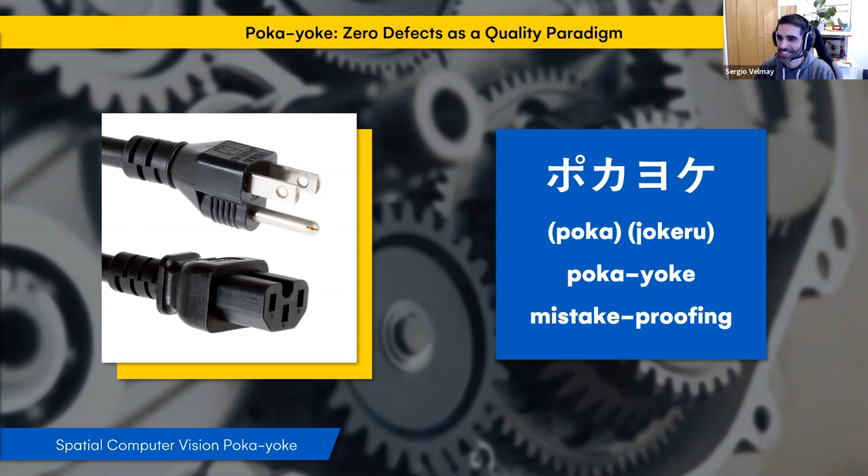Okay, here is the real world use case I chose for my proposal: a factory from my hometown, Getafe in Madrid, Spain.

In my job I have to go to the factory sometimes, and I speak with the operators and the QA staff and other people there, and they told me about the Poka-yoke methods and this kind of thing. I learned a lot. I was there to make a software application, but I learned a lot about the production processes.

And I chose the manual assembly lines, which have to incorporate that kind of Poka-yoke methods.

One of the problems they have is part picking. They have to assure that the operator took the correct parts. They have a lot of boxes near each other, and the parts are very similar, with just a little difference in shape or height.

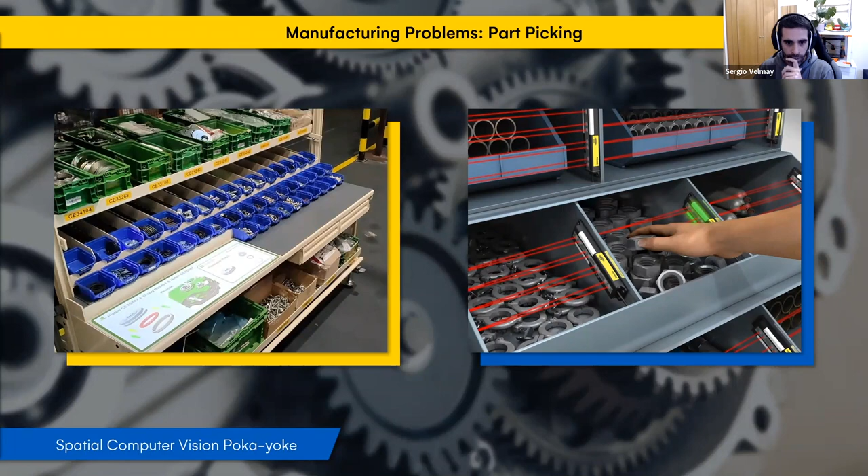For this first problem, I also used the depth information from the Oak D lite camera. It's very simple: the camera is placed on top of the picking area, and using the 3 axes we can follow the movement of the operator's hands and know if they are taking the correct parts.

For people who don't know, Oak cameras can run neural networks on the device itself. So you can train an image classifier, an object detector, or an image segmentation model, and then load it onto the device. The device is basically a camera.

It also does depth analysis, so you can know that a part is at a certain depth. It's sort of like the human visual system, which uses stereo vision to estimate depth while also interpreting the scene. Both of those things are in the Oak camera.

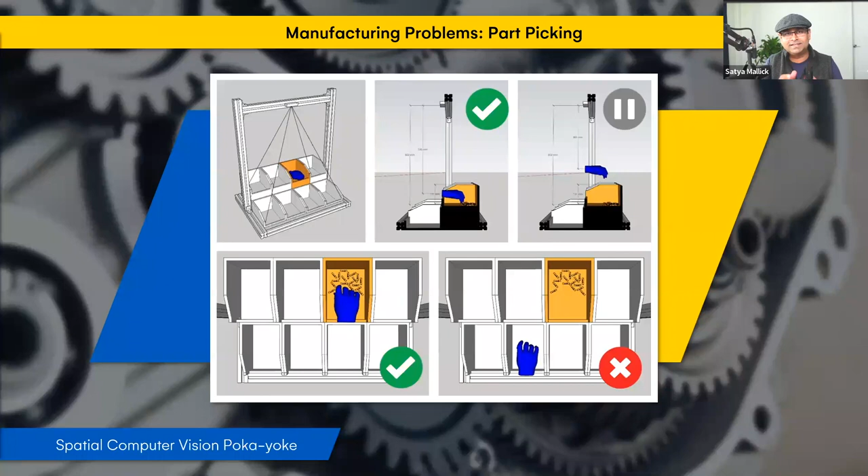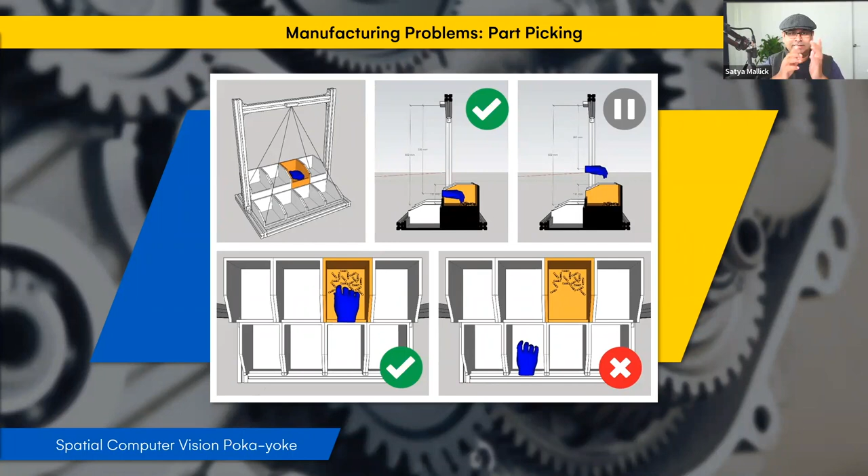If you look at the distance between the two cameras, they were also designed to mimic human eyes. The distance is about 72 millimeters, on the upper side of the human visual system range. The interpupillary distance between our eyes is usually somewhere between 65 to 70 millimeters. It looks a little something like this for those on the stream. It's pretty close.

I have to say I love these parts of the show when Phil appears like a banner. You're welcome, you got to give the people what they want.

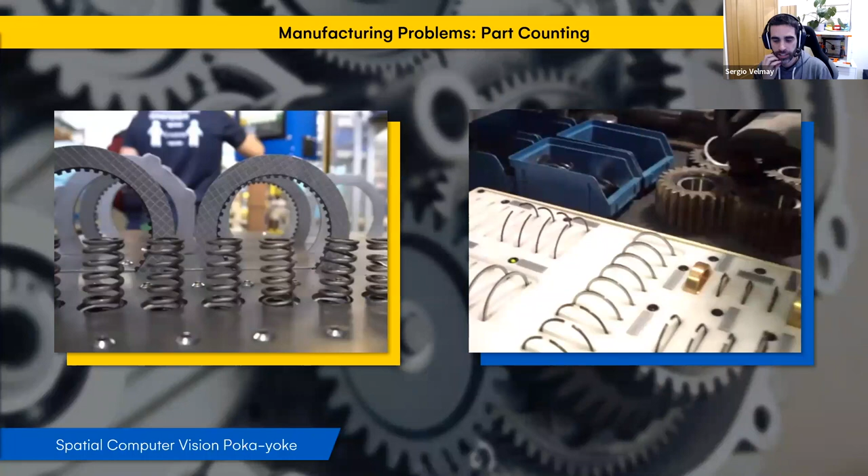Okay, a second, I have one more. I actually have a question here. I noticed you're using specific little bins, and it looks like - what did you make your little apparatus out of here? Because this is custom built, right?

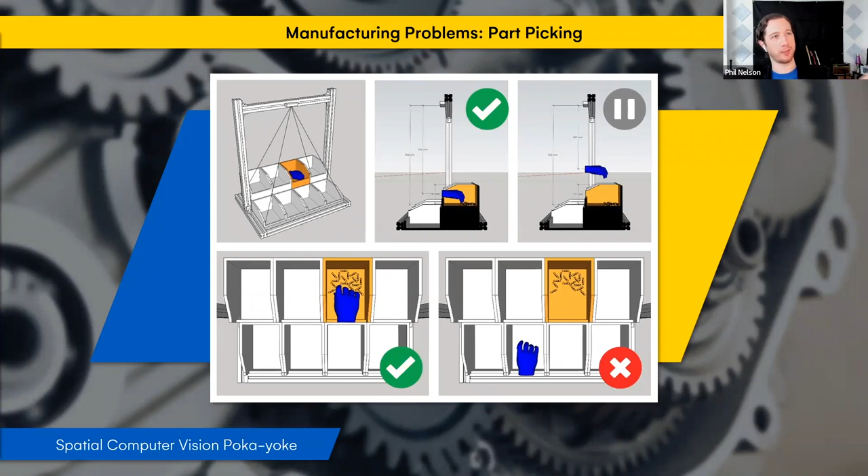Yes, it's custom built. It's a modular aluminum profile. With those slots in there, you can just order them cut to size, or buy them in a bundle. You can buy it at the size you want, and they have some screws, and it's modular. You can build whatever you want. It's not very expensive, and I built mine in 1 hour, and it's pretty simple.

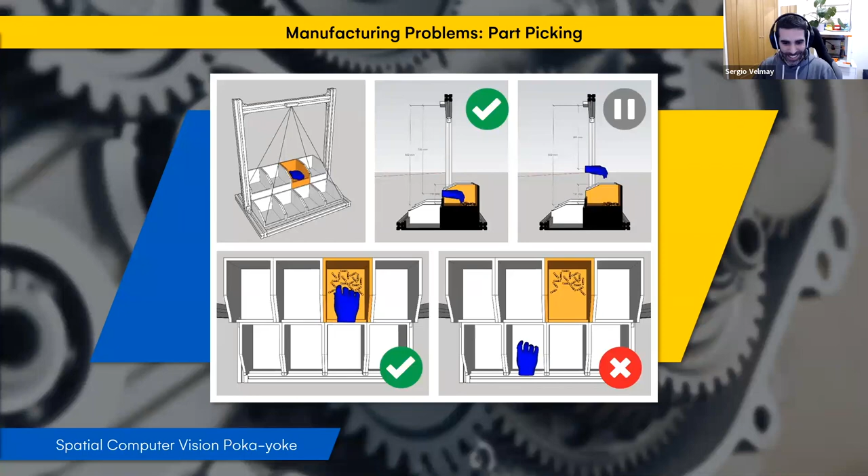Yeah, I love seeing off the shelf parts being combined in new ways. You can see it here behind me, it's the prototype.

Okay, the second problem I saw at the factory: they have to assure correct part counting, and at the factory they have very complex tables with lots of sensors. The operator spends a lot of time putting each part in each place at these tables before the assembly, and it's a lot of time that they spend only counting parts before the start.

Just so I understand, there is a table, the white table you're looking at on the side, and all the parts are placed at a specific location, and that's how the sensor inside would say, okay, the part is present and now use the part. So this whole setup is good, but you also need to spend a lot of time putting those parts manually onto this table. Yeah, that's correct.

And the two tables on the left - you need, for example, 12 springs, and you have to put the 12 springs, because the whole assembly cell needs a signal from the table that it's okay, all parts are in place, and you can start the assembly.

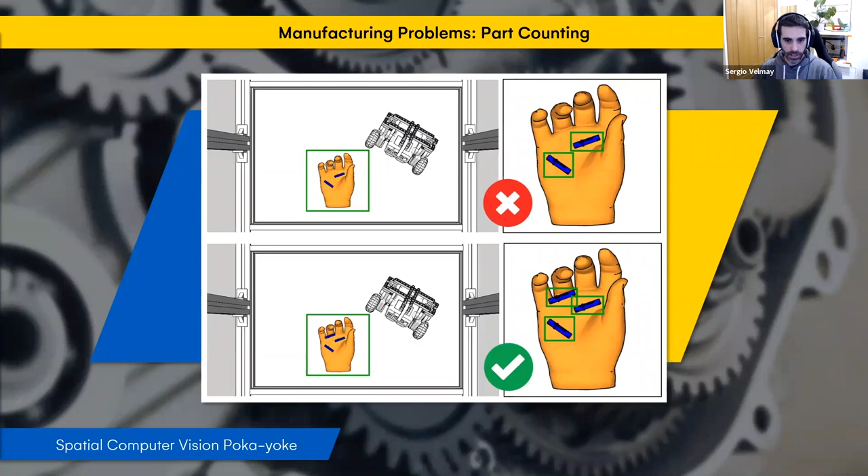Okay, and the third part is the most important one, because Poka-yoke methods try to avoid human mistakes, because an error in the production line becomes a defective product at the end of the line. For example, if you are making water bottles, and a bottle costs you a few cents, you can put a camera at the end of the line and throw away the 2 or 3 bottles that aren't okay - the label is misplaced, or they don't have the cap. But in this kind of assembly line, one defective product is a big deal.

And it's not easy to detect a failure or an error when you are building this kind of mechanism. For example, this is a gearbox from - well, a vehicle for the farm, I don't know how to say it in English - you know, like John Deere vehicles, a tractor, or like a harvester or a combine. Harvester is the word, thank you Phil. Yeah, you got to remember, I'm from farm country.

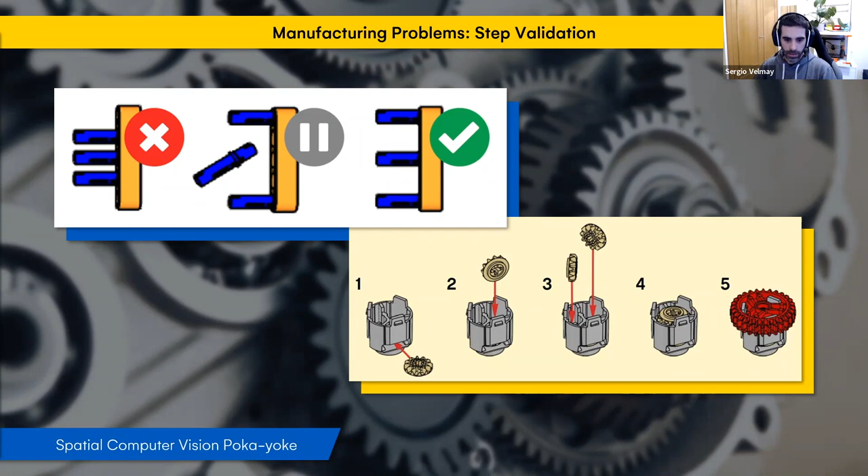This is the last part of the problem I want to solve with my proposal. In the next slide, here I have my prototype.

At this point, I think in the contest there are maybe two groups of proposals, attending to the relationship between the OAK-D Lite devices and the Lego kits. One group, I think, is where the camera looks or points from the Lego to the world, like autonomous robots or structures to hold the camera and move it. And I think there is another group in which the camera looks or points to the Lego.

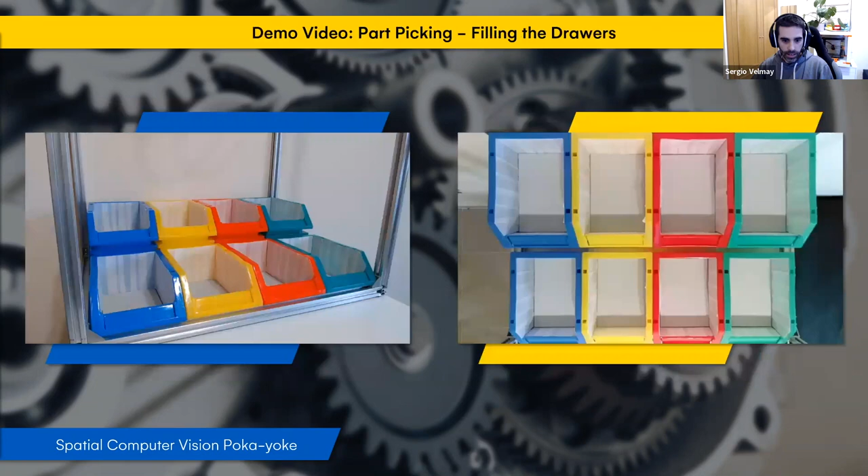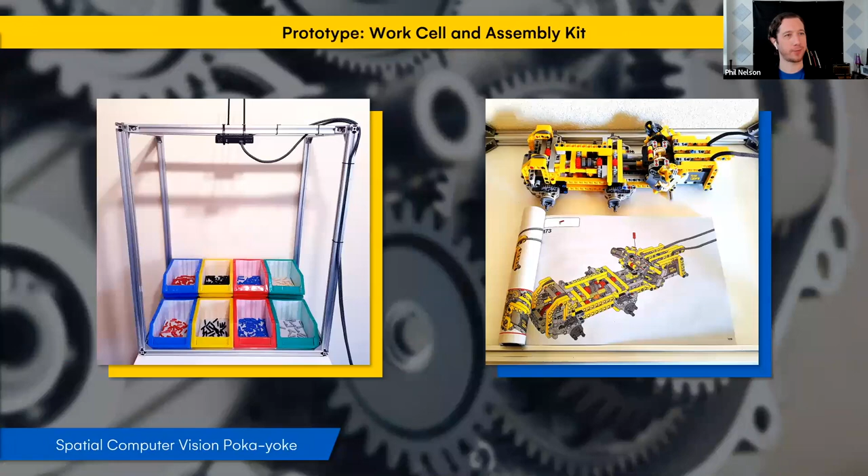Here we can see... it's not starting. You may have to right click and replay it. Those are GIFs, right? No, they are videos. Okay, now it's playing. I want to play the two at the same time, but also I just pissed off half the audience by saying GIFs instead of GIFs.

The right view is from the camera on top of the structure I built.

This is only the preparation of the... we cannot play media, I'm sorry. Can you open it in a different window? Yeah.

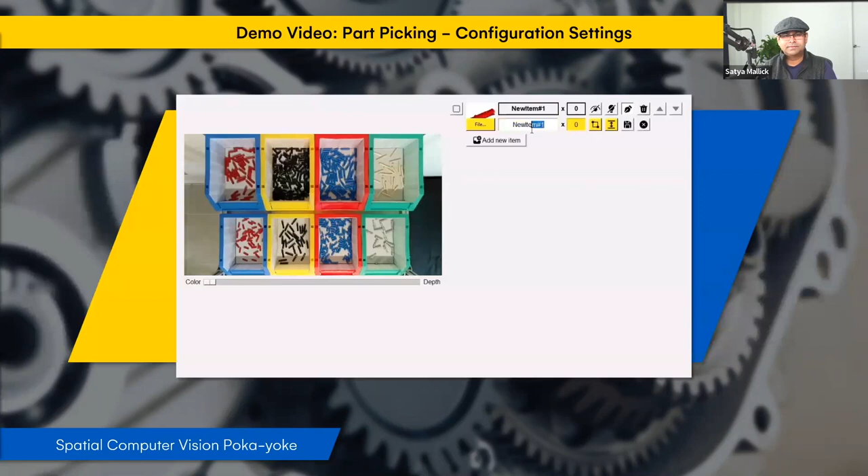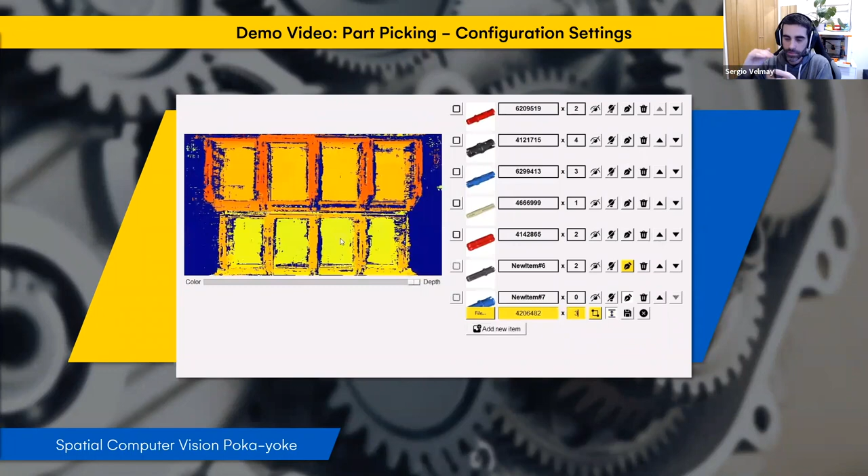Here we have the application that you have to set up. You have to tell the application where each part is, where do you put it, and you draw a rectangle that tells the application where the box is, and then you choose the range of the depth range. So you select the bottom limit and the top limit. Okay, and with that information...

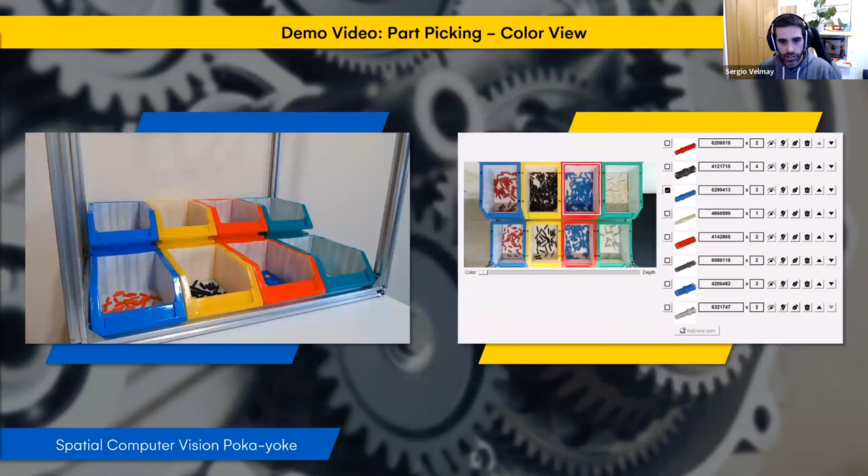Here at the same time. This time it works.

Here I am using the MediaPipe model to detect the hand. This gives you the center of the palm, right? It's actually doing palm detection. Yes, it's only the palm detection.

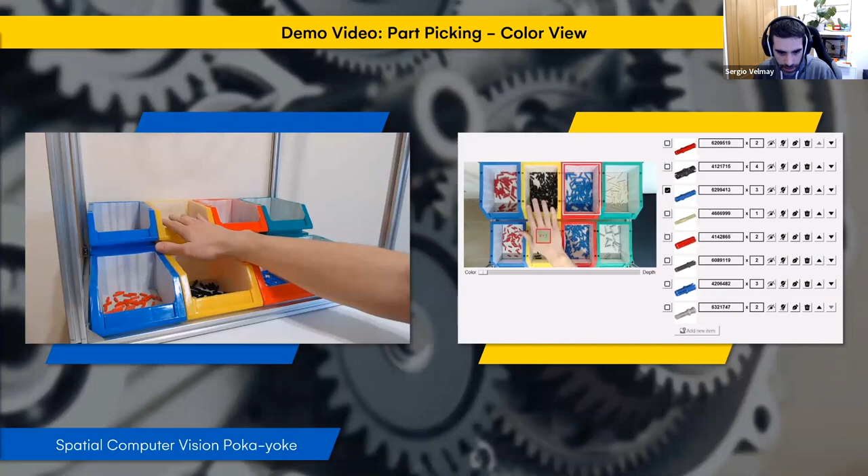I can calculate the three axes, the position of the hand in the three axes, and in this video we can see the depth estimation. You need to put your hand in the correct place in the three axes. But some sensoring systems fail when, for example, you put a piece of paper in the box, or a glove or something. This way you detect the hand and you can measure the depth also.

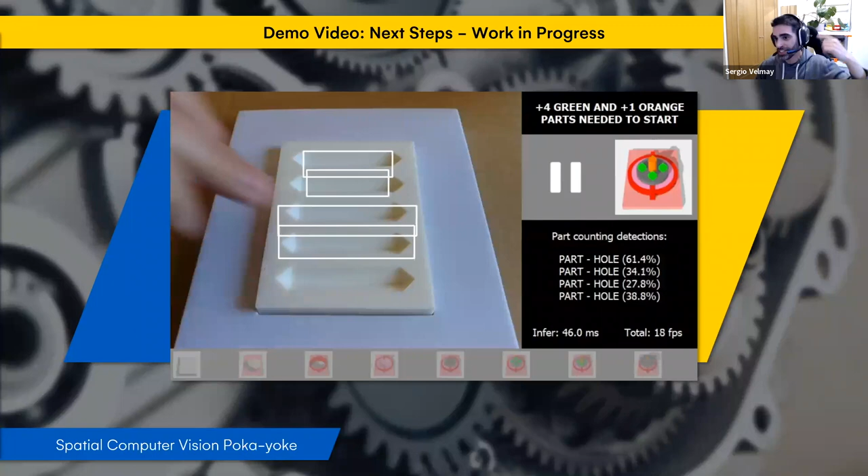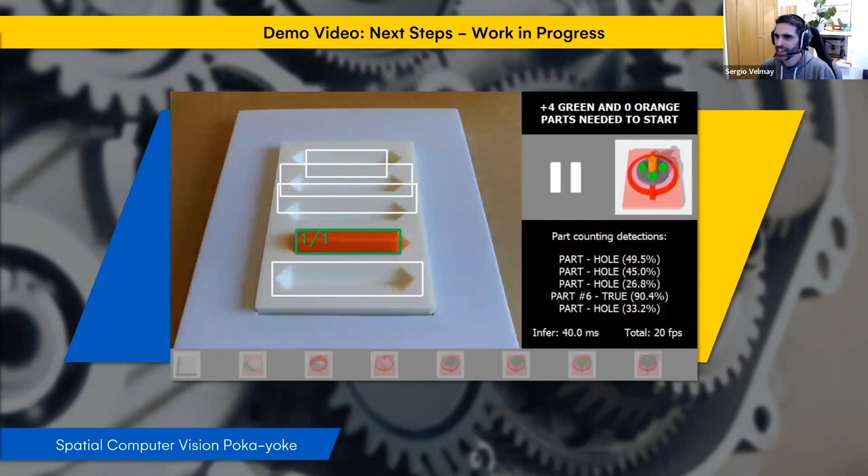Okay, and finally, this is a work in progress. This is a video from my past participation last year in the OpenCV AI Competition 2021. Yes, that time I was in the miscellaneous category, and now I'm in the manufacturing category. I'm in the correct place, I think.

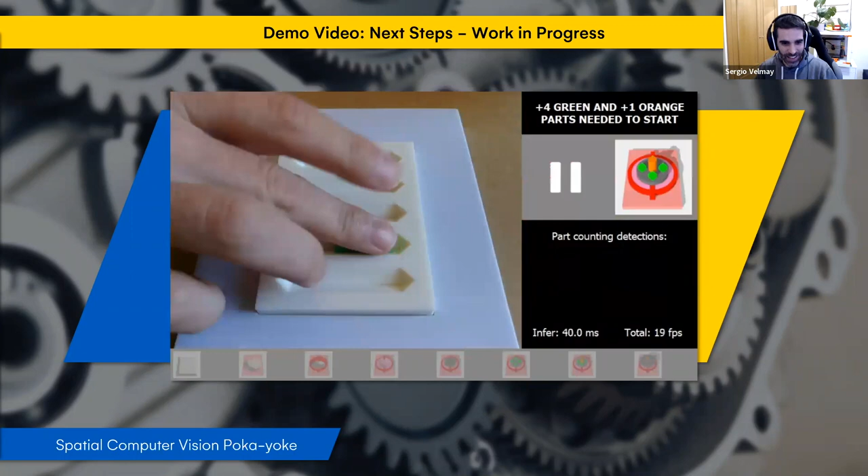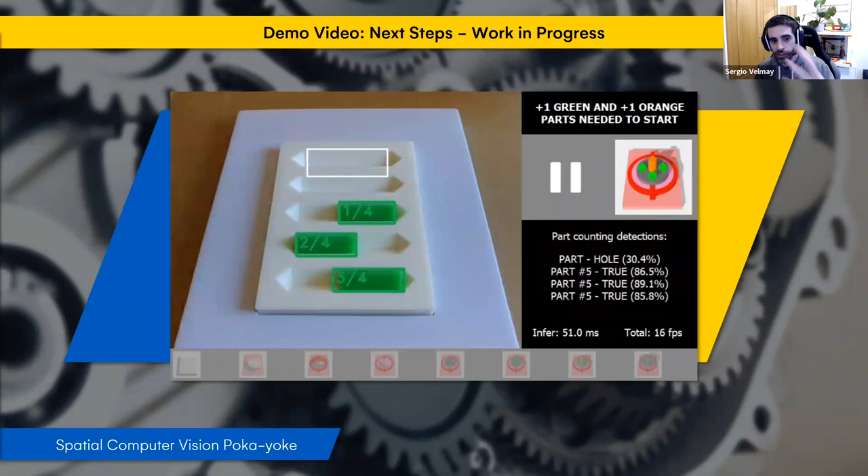This is correct part selection and part count verification. At the beginning, you can see that you need 4 green parts and 1 orange part. If you put one more than you need, it tells you to remove it.

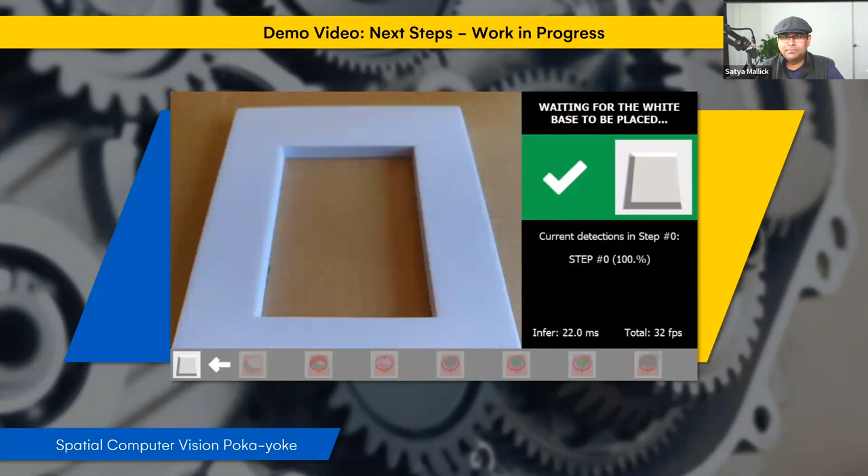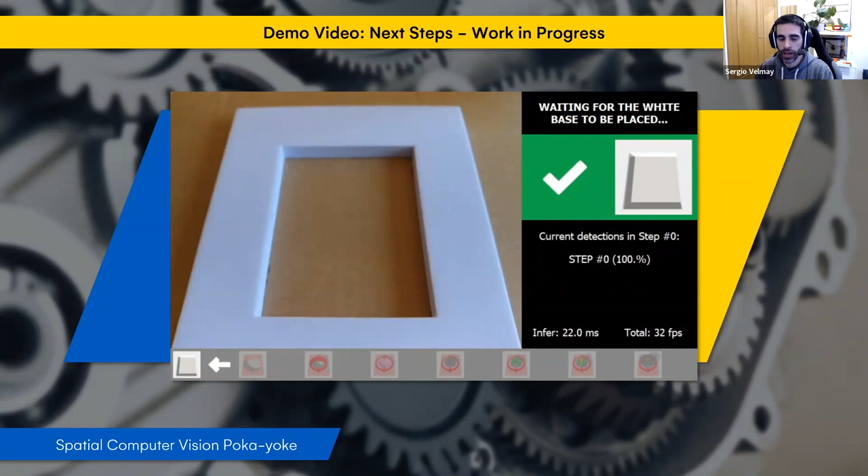So is the detection being done on a color basis, or did you actually train an object detector classifier? You can do it with detecting only the color, but I built an object detection model.

In the real world, at the factory, most of the parts are metallic, steel, or very similar in color. Have you tried using those real parts to see how the object detector works?

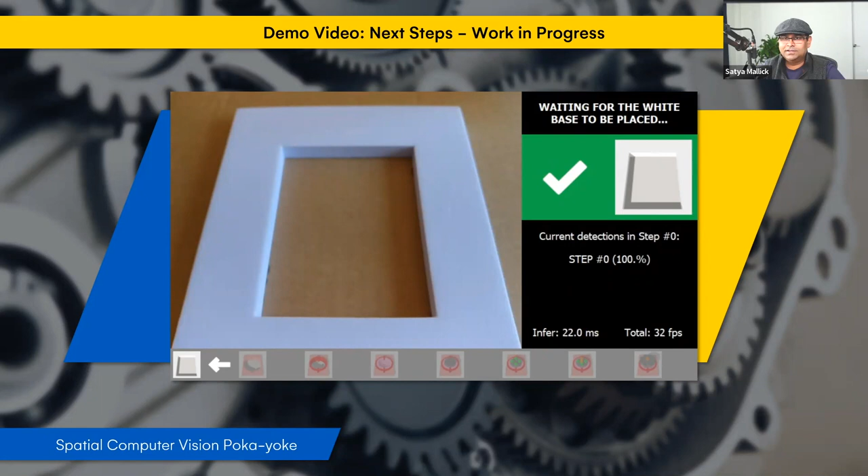With this specific model? Yeah, for this project, if you go back to the previous slide. Here, for example, the different parts, are you detecting the parts based on location and depth alone, or also identifying the part once it is in somebody's hand?

No, here you have to configure where which part has its box inside. Got it. But you can also build an object detection model and automatically put the correct part in the correct place. Right, but when somebody picks up the part, there's also a chance there could be contamination from one box to the other.

Some part could have dropped into the other box, so it would be a good idea to verify what you have picked is correct one more time, before. With the part counting, I want to do that. Got it, you see the parts and detect the correct one and the wrong one in a second step. Okay.

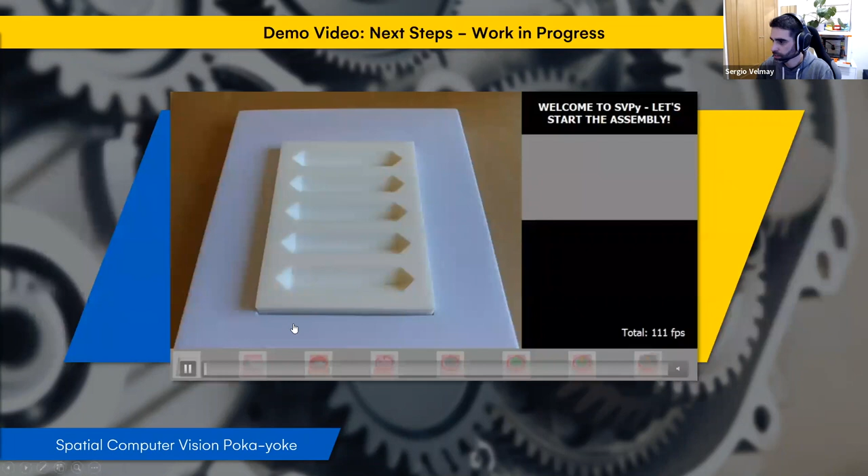That's basically what I am doing here, for example. If you see the detections, there are four of part 5 and one part number 6, and I am identifying each type of part.

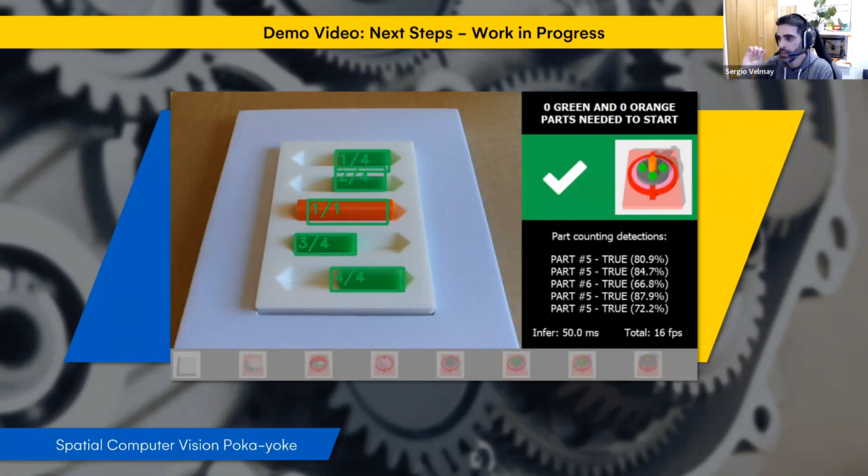Yeah, it's pretty cool. So what did you use for this user interface on this project? I'm using TKInter, it's a framework from Python. You don't have to install it, it's part of Python.

No third-party dependencies, I like that. Yeah, but I started coding in Python by myself. I'm not an expert in Python or in TKInter, but you find a lot of documentation and forums on the internet, and it's very easy to build. In my application I have a lot of methods linked, from buttons and this kind of thing, very simple to accomplish whatever you want.

That's great. What about the models? Are you training the models using PyTorch, TensorFlow, or how do you plan to do it? I'm not a machine learning expert, and for the models I use a service from Microsoft Azure.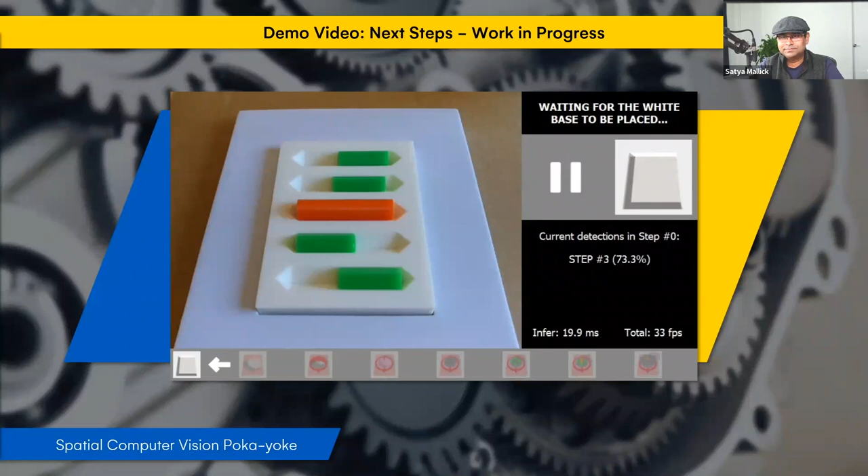So there's another question I had. In the manufacturing process, is there any chance you would be able to get some of this tested in a real manufacturing plant? Not in this one, not for the competition, but after the competition, is there any chance you'd be able to test it? At Brabant, the company I work for, we have an application similar to that in production right now at the John Deere factory. I cannot show you the models, and it's much more complex, with specific problems they want to solve, but yes, we can test this kind of approach at the factory.

It's very, very interesting. You can talk with the operators and the QA team, and they give you a lot of feedback. They have a lot of key points they need to achieve, and you learn about the process itself. It's very, very interesting.

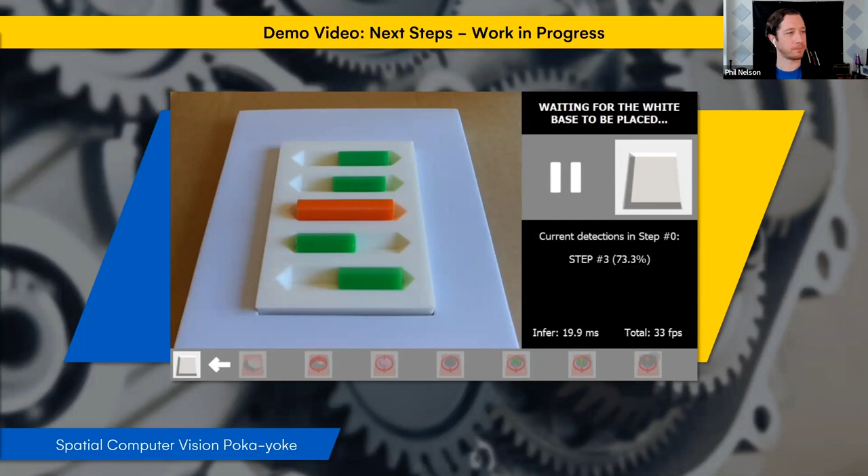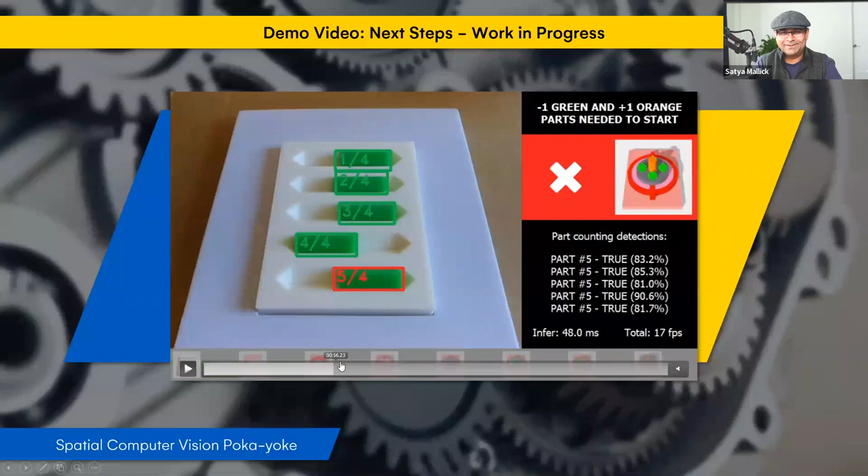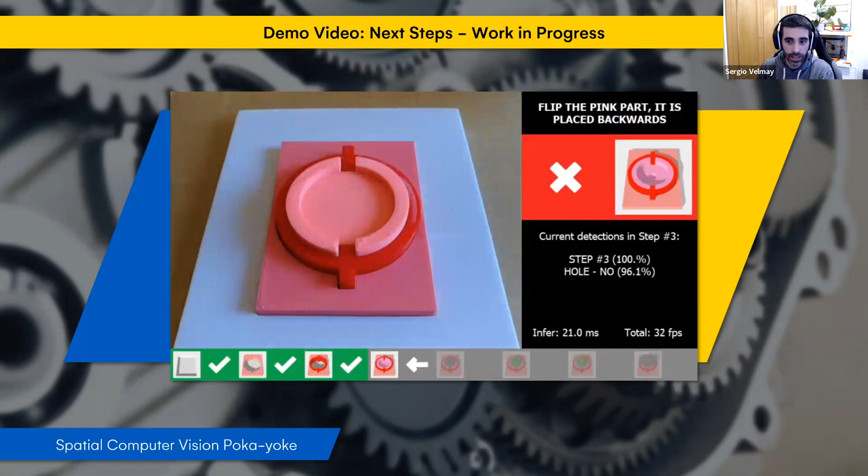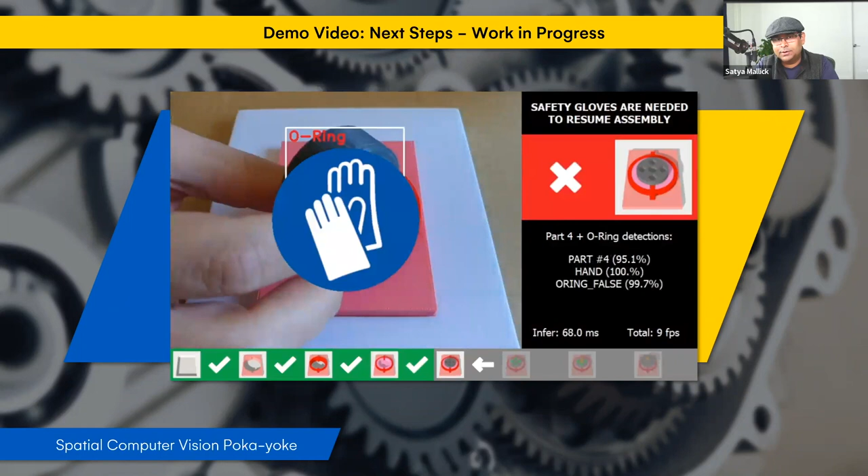We have here a step sequence verification. You have to put some parts after another. Here we have the correct part placement. When the system detects an error, it alerts you. Here is another model to assure that the operator has the safety gloves. So it's a classification model, checking when the gloves are detected. Is that a classification model? Yes, it is.

We can choose when to launch this model on top of the step, for example. Some of the processes need to manipulate a press, a screwdriver, or a hammer, and they need to wear glasses and gloves.

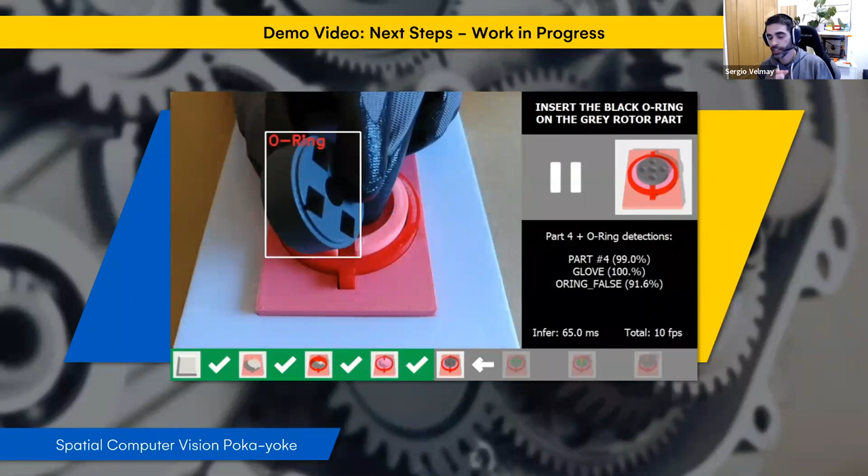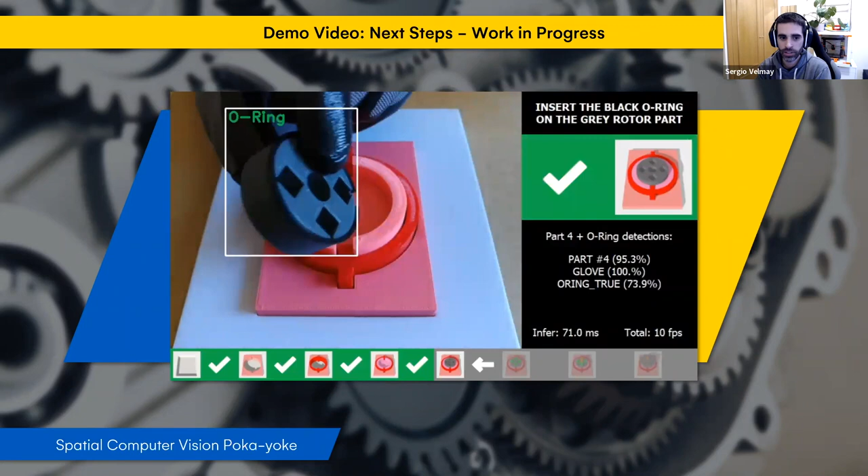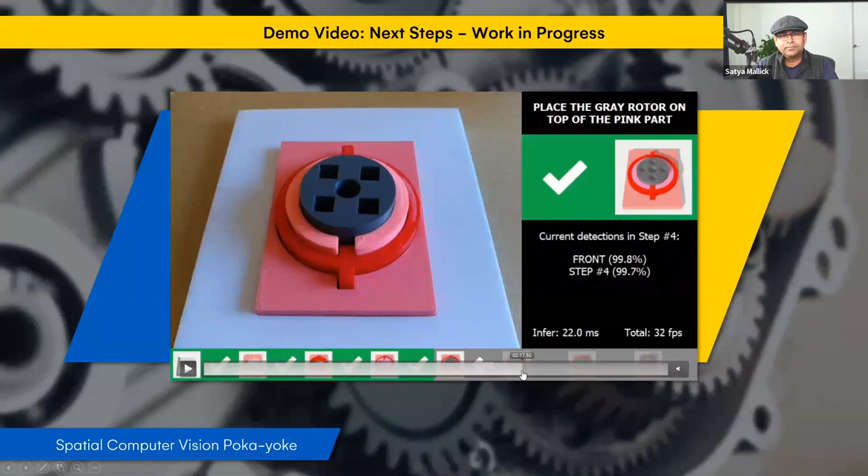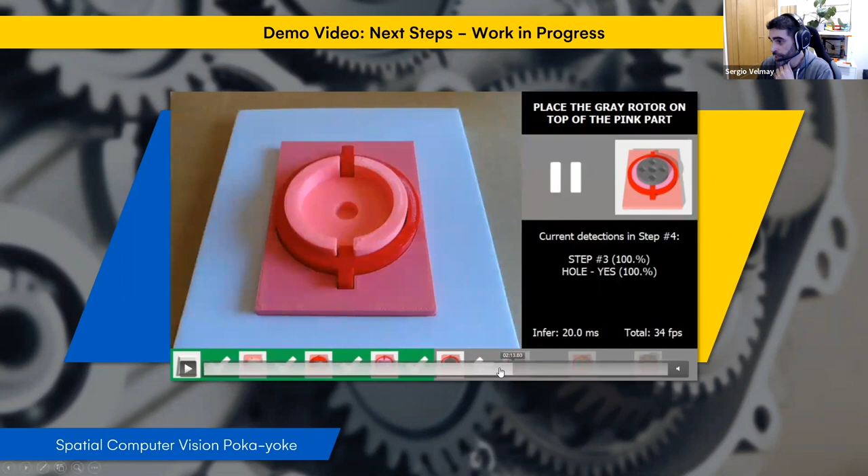This is an interesting use case. They have a lot of parts that when put into the assembly, like this little black ring, when placed correctly, you cannot see it from the camera. You put it that way, and this small part is at the bottom of the gray part. For that use case, the system detects the part when the operator goes to place it in the assembly, and you make an object detection, and then a classification to tell if this part is present or not.

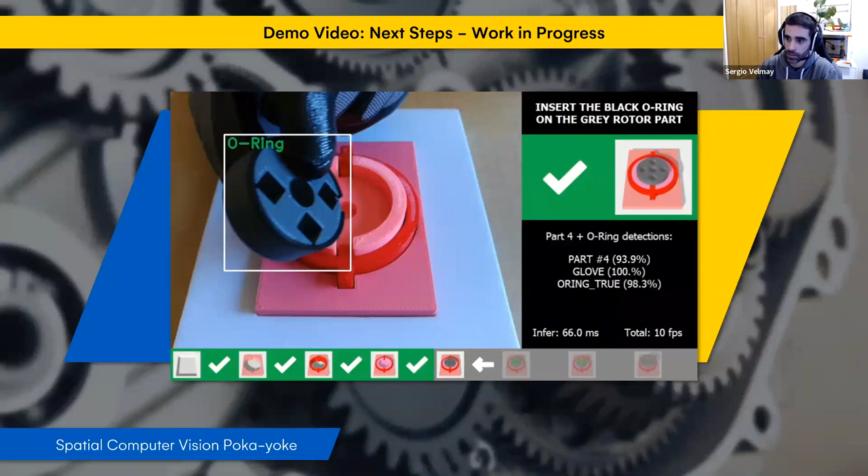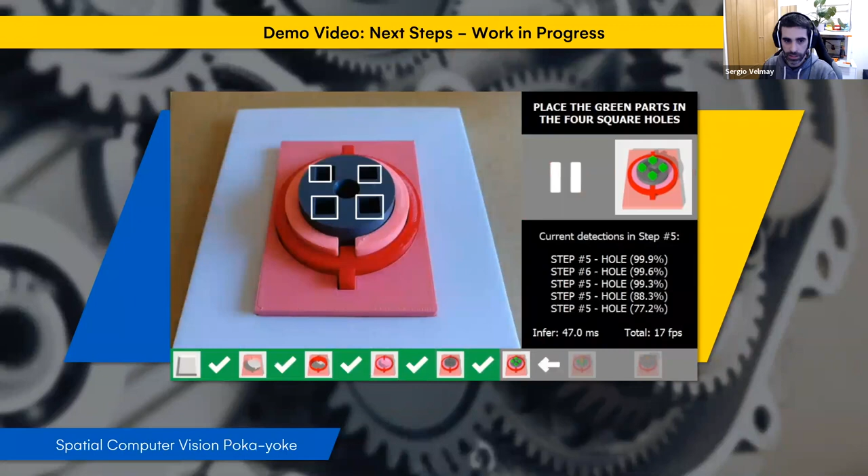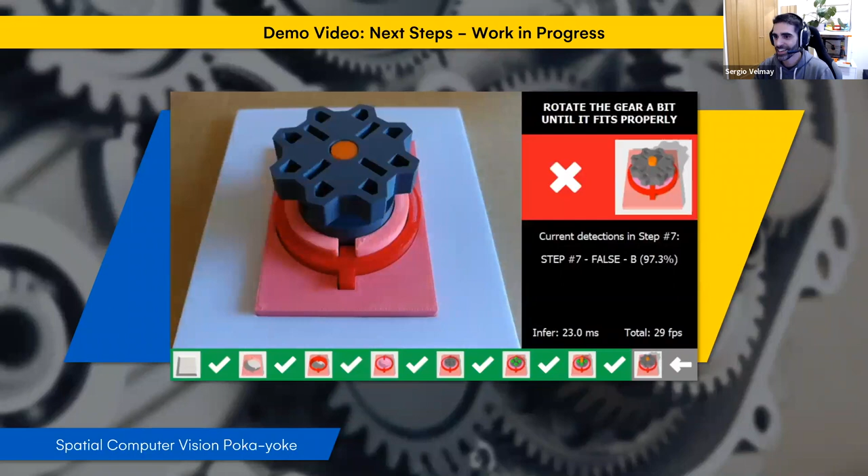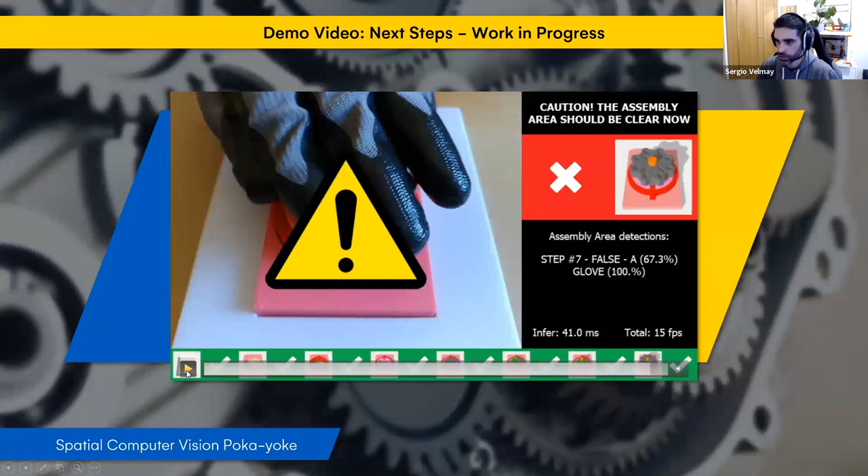And then you have object detection and part counting here also, and these are some errors you can make. All these kinds of errors, the QA team can tell you about, since they've seen tons of errors at work. Here you can, for example, stop the press if it detects a hand on top of the assembly. So this covers security concerns as well.